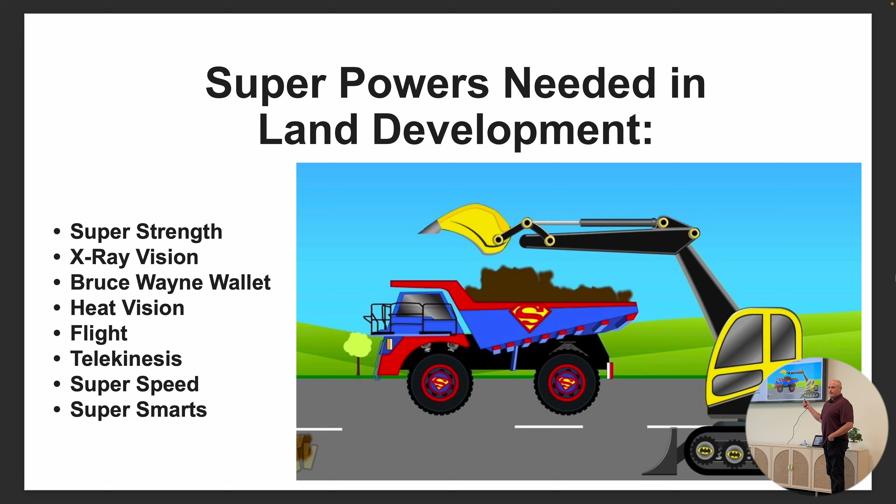So the way to get around all of these superpowers that you need is you've got to put in the extra work to plan and prepare your projects for success. Once you have the proper planning and preparation, the performance is going to come as a result of those two steps. So if you put in the effort up front to go through the due diligence materials, to work with your contractors, your city, and your engineer, you're going to find success at the end of this project, no matter how rough or rocky it is.

And every one of those projects that I mentioned that I had trouble with because I didn't have X-ray vision, all of those somehow strangely worked out. So in a world that's really challenging sometimes, I think we both have to accept the challenges as they come and take it for what it is, no matter how rough those challenges might be.

And then from there, we also have to have a bright outlook and hope for what the future can bring, because the reality is if we put the product out there, it will be well received by the market and we'll find a space that works for everybody.

And so no matter how bleak some of the things that you discover during the land development process might be, there's always room for hope that future project and the outcome will still be a good end result. And I'm here to tell you, even on the most challenging ones, that's been the case.

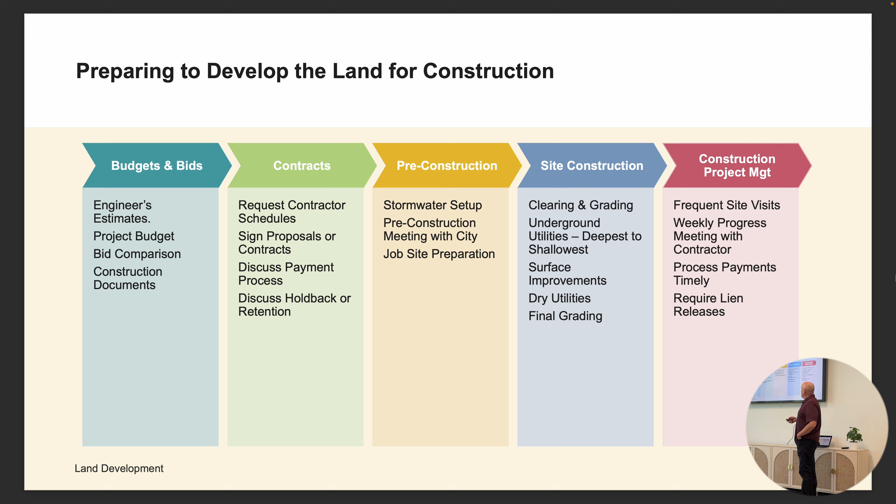The first step in our development process is we've got to prepare all our budgets and make sure they're lining up with our project expectations. So right out of the gate, we're going to start reviewing all of our original budgets and comparing them to how the project is shaping up.

During due diligence, one of the most beneficial tools we have is our soils report. That should be the number one thing. Once you get a project under contract, that really should be the first thing you order - a soils and environmental study. That will dictate almost everything that happens in the actual construction phase of your site, even though it's kind of a silent document that you just have to check a box to get.

It's going to dictate how thick your pavement is going to be. It's going to dictate your road design as far as how much subgrade and everything else you're going to do. It's going to dictate even down to the footing level of the homes that are going to be on these finished lots you're going to create. So the soils report is really the number one key document you're going to focus in on, and that's going to impact everything else. It's going to have a domino effect through your budgets and through your schedules and everything else.

To speak to that a little bit, Steve and I did a project out in Eagle Mountain once, and when we went into it, we knew we were going to hit some hard rock excavation, because we analyzed the soils report. We even did additional borings and digs to try and map out exactly where the hard rock was going to be on this site and where we could expect problems. All of that work we put in up front helped us get a better picture of how the process was going to go, and it also helped us on the budgeting side to be prepared for some of the additional costs of hard rock excavation and the additional schedule implications.

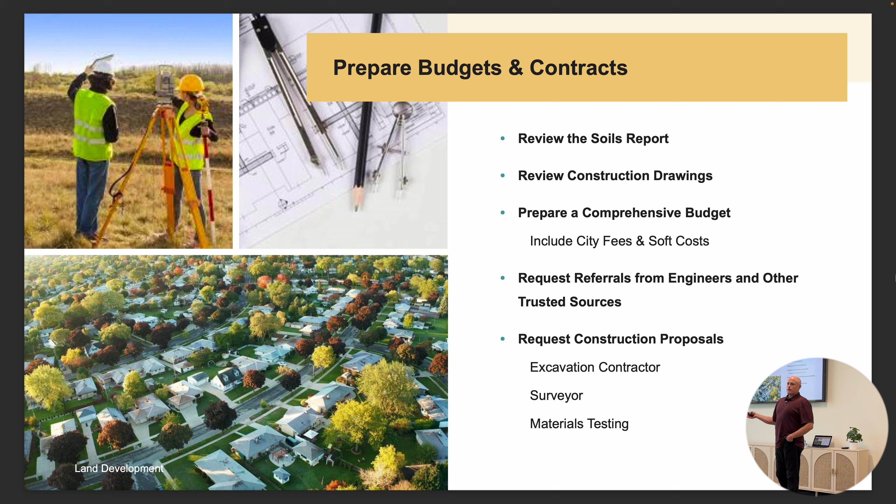So you're going to request bids from your excavator, your surveyor, and also your materials testing. You've got to make sure your soils engineer, usually I go back to the same guy that I got the original soils study from. The geotechnical engineer who gave me the soils report originally can usually handle the testing too. So I'll go back and request that, and once I get those proposals back, we'll start putting those budgets together.

If it's a really small project and a really small contractor, he might not ask you for things like the CAD drawings, and he might do it old school. And that's fine too. It just depends on the size and scope of your project, right?

When you're bidding your subdivision out, I think it's a great idea, and I use this as a best practice for every subdivision I do. I have my surveyor go out and do centerline staking in the roadways at every 50 or 100 feet, depending on the size of the project. If it's a small project, I'll do a tighter spacing on the streets. If it's a huge project, I'll get less stakes.

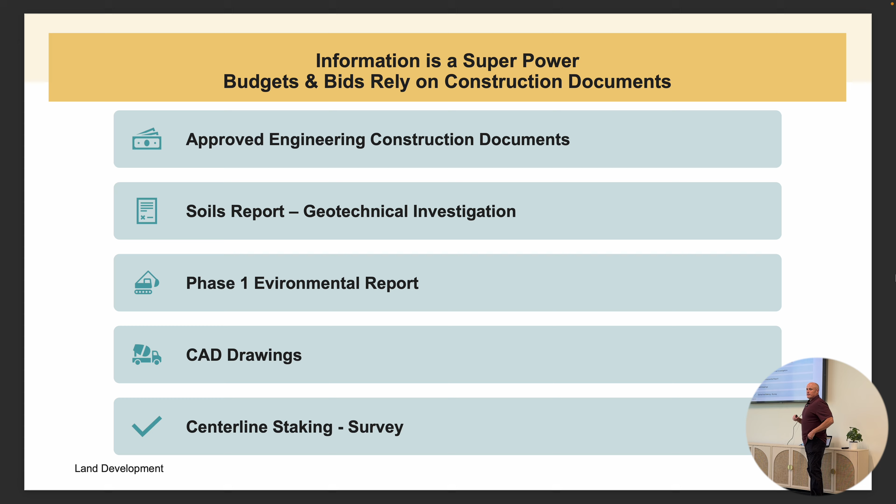Okay, this is the interlude. After you start getting your proposals back, you're going to start doing all of your number crunching. And really what you're looking for here is the sanctity of your Bruce Wayne wallet. You're trying to protect that.

And you want to make sure that you have enough money to finish this project once you get started. So this part is pretty simple. You're going to compare your bids to your budgets. You're going to request schedules from each bidder and make sure that those schedules still work with what your project timelines were expected to be.

And then you're going to go through and discuss contract-specific things with the people that you're going to award these contracts to. So you're going to discuss with your excavator, hey, I've got a construction loan on this, a land development loan, which don't exist anymore, so you're probably really working with a Bruce Wayne wallet somewhere. But if you do have a bank loan for development, which isn't common anymore but could be, you're going to discuss when he needs to turn in his invoices and when he needs to work with you on construction draws, how often you're going to be willing to do that.

Some contractors want to do monthly billing. That's usually preferred, and if your project isn't too big, that usually works with most people. Some other projects might be so big that you might do a payment every week or something like that. But this is where you discuss that. After your bids are in, you're going to discuss how payments are going to happen, and you're going to discuss timing of what to expect from these contractors. You're also going to discuss any holdback or retention and the lien waiver process that you're going to hold the contractor to.

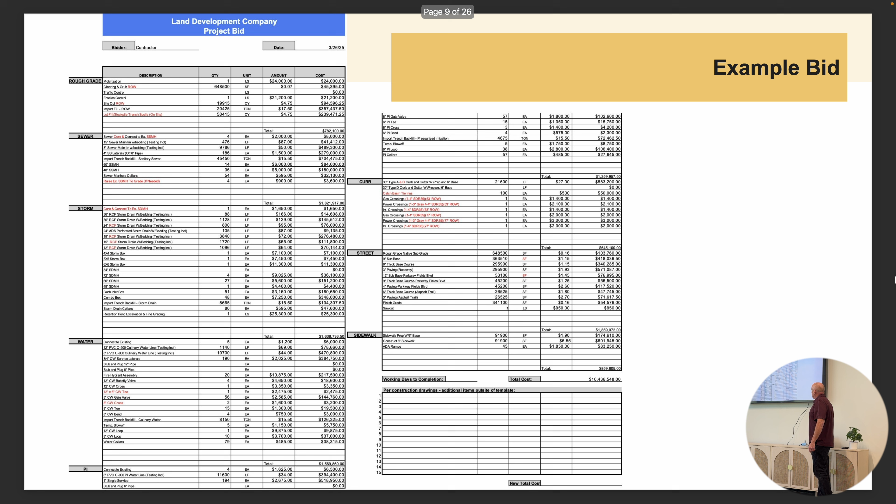So if we go back to our original budget - well, let's go to this. This is an example of a project bid. When I send it out to bid, this is the other thing that you might find useful. I'll usually fill out a project template that shows them the blanks to fill in, and this usually starts from the engineer. So a lot of times I'll request this engineer's estimate that will outline the quantities of material and pipe that go into constructing this subdivision.

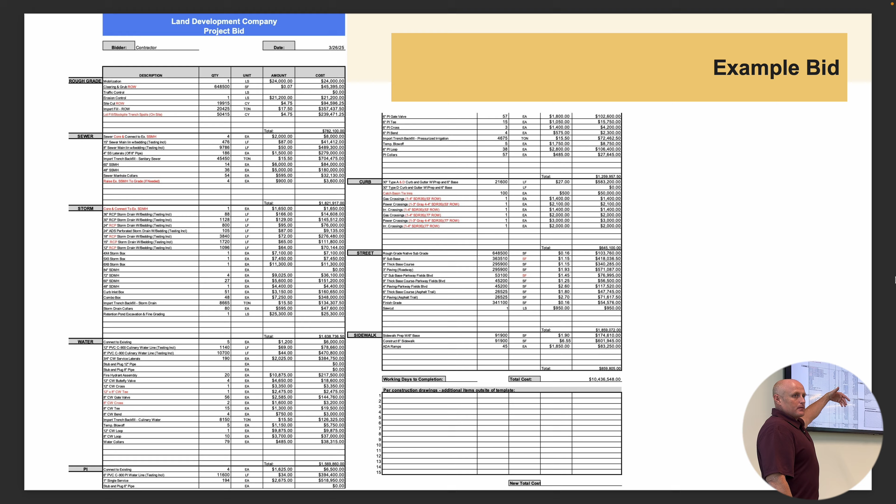They might charge you $150 or $200 to prepare this engineer's estimate, but they'll go through and fill in how many linear feet of pipe - or you can do your own takeoff. But I'll fill in a project bid template so that they know where I started from and what my expectation was. And when they do their own takeoff, if they get something different, it's really easy to compare their notes to mine. Then I'll be able to see where they're different and compare - why is your bid higher in this area or something like that? But it all starts here.

Their invoicing usually mimics how their bid comes back. So say they turn in an invoice for sewer. We know that at the sewer stage they're going to have pipe they had to buy, manholes from a different supplier, and gravel to bed that pipe with Staker Parsons or Geneva or one of the gravel pits. They're going to have all this material, so you go down your list of pre-lien notifications and say okay, I'm going to pay you for this section. You're billing me $1.8 million for the sewer, so I'm going to joint check you along with Staker Parsons and the pipe supplier, Core and Main, and Oldcastle precast for your manholes. You go down the list and think about who you need to pay along with that excavator.

Like Ronald Reagan, we want to trust but verify. We want to trust that our contractor is going to be good, but we also want to verify that the project costs are paid, because the lien goes to us, not the excavator or the general contractor. So we need to protect our interests and make sure those lien notices match up with our progress payments. That's very important. You're either going to request a lien waiver as a condition of him picking up the check, or you're going to straight up joint check them, and they'll have to get the gravel company, pipe supplier, or precast concrete company to endorse that check for them to cash it and get their $1.8 million.

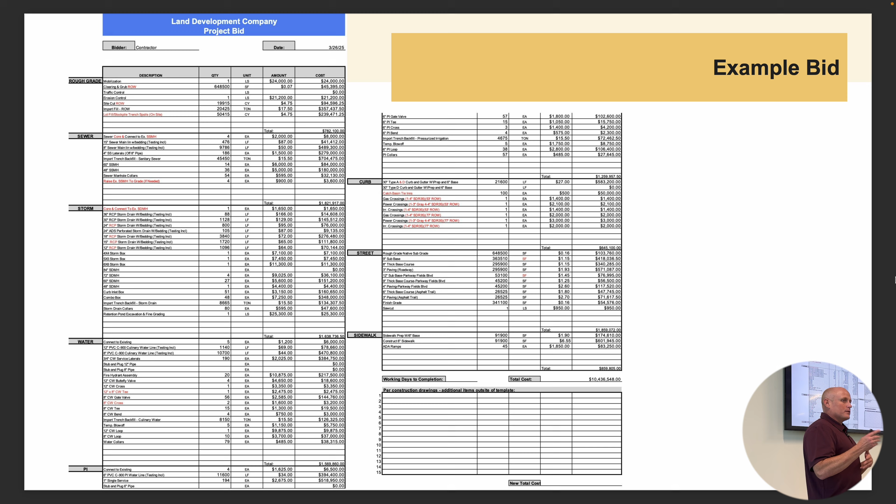If you don't know how to do a joint check, ask your bank—they will help you through the process. Any bank knows how to do them. Your accountant probably has done them in the past. If you have an accountant or bookkeeper, there's somebody in your network that knows how to do this, but it's for your protection.

Once you've got all that discussed, you're going to go through and award the project, but you're also going to do that after you compare all your bids. I've got this in the collateral that Steve's going to send out to you, so the assets you'll walk away with today are examples of this—you'll see this is a bid comparison spreadsheet that I did.

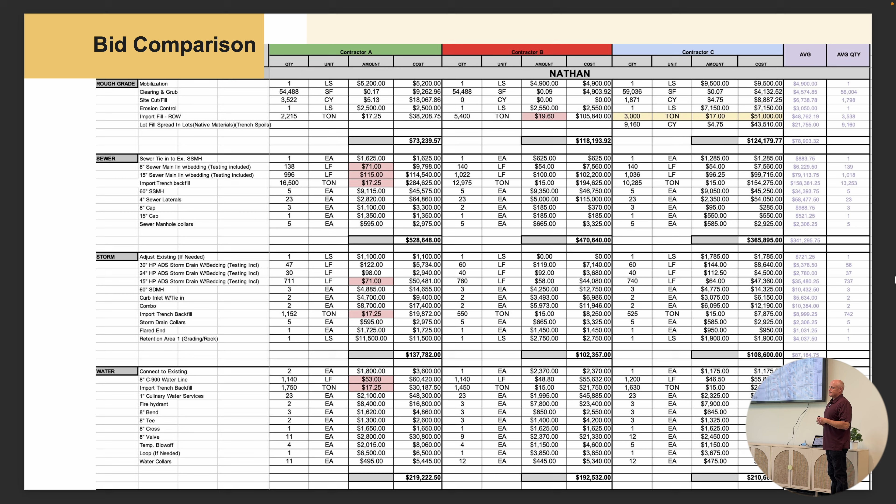I've learned from sad experience that sometimes the cheapest contractor or subcontractor is actually more expensive, for a number of reasons, like taking longer or doing poor quality work that I need to pay someone else to redo. How do you make sure you're choosing the best guy for the job while having budget in mind? I know you just touched on this a little bit.

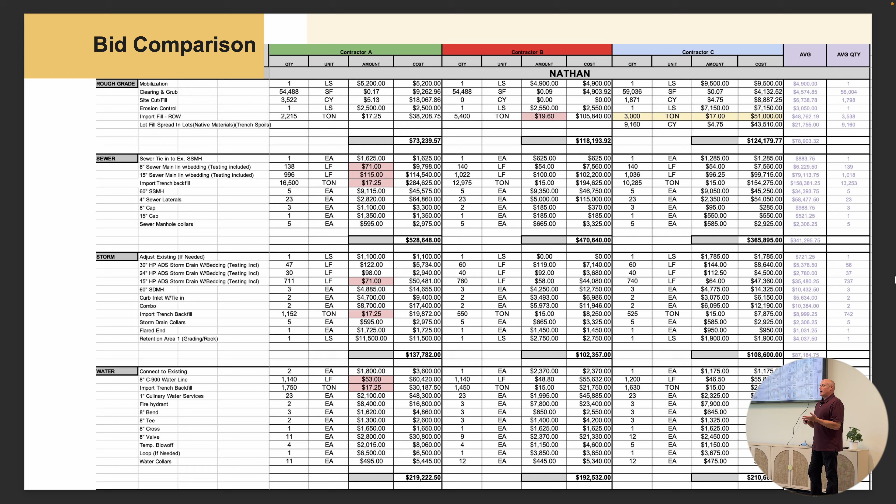That's a great point. There are instances where I don't pick the lowest bidder, that happens more often than you would think. The process for that is a combination of experience, reputation, and maybe a referral too. I'll give you a good example of that.

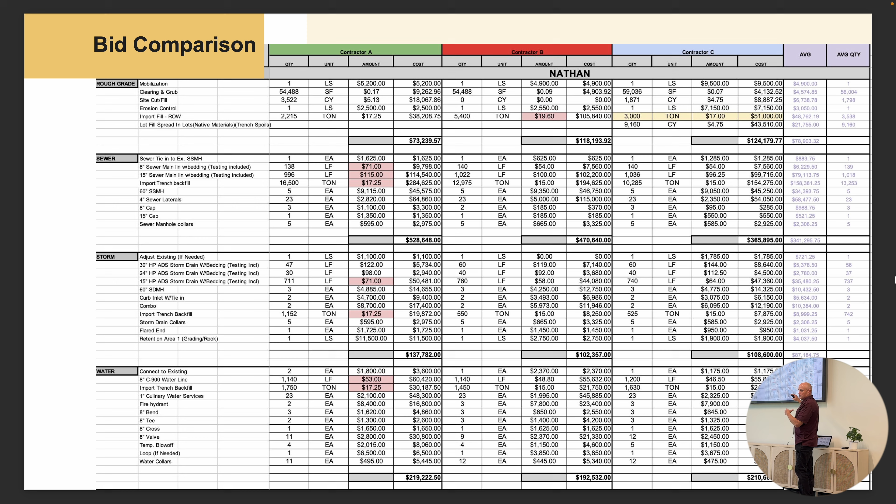I went with a contractor on a project I did in Phoenix two years ago. When we did this comparison process, we didn't know these guys at all, they were in a totally different market from us. As I started to narrow down the two guys I thought were the best, along with this spreadsheet, the other thing you've got to take into consideration is...

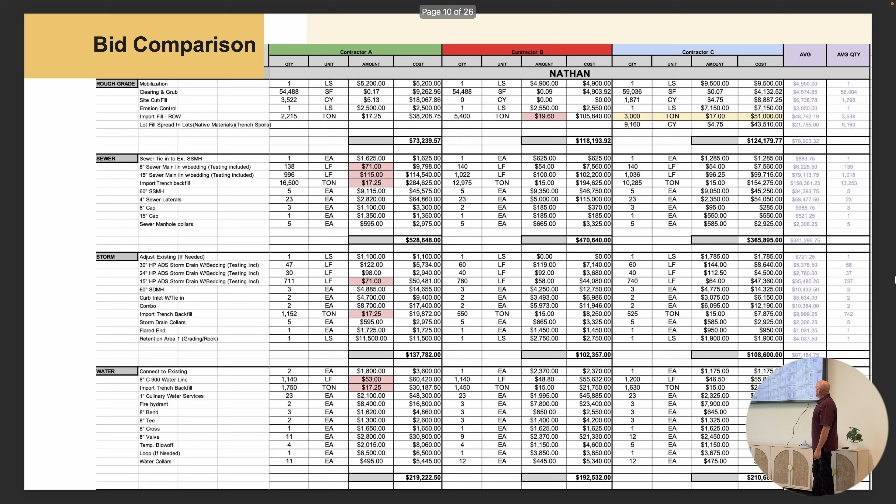I don't know if I have it in this section or this one, but during the bid process you're also going to be requesting the schedule, which is also included in the stuff we're going to give you today. During this bid comparison, you're also going to be comparing schedule. If you've got a really small contractor whose price is super small, and he might be the most compelling value dollar-wise, what if his schedule is two or three months longer, and that puts you in a window where you might not pave this year?

Well, then you're waiting till April the next year, right? So now's the time to start asking all those questions.

So going back to that Phoenix contractor, we started narrowing it down to 2 people that we thought were looking pretty good, and we started to dial in these overall numbers, and we started to ask questions from people we knew about what those contractors could really deliver. And you know what else we did? We asked those excavators, those contractors, to tell us what are some projects I can go visit that you're doing now or that you recently completed, so I can go walk them and see what your process is like. So this is the time to start doing all of that due diligence.

Both of your comments are super relevant in that space. Now is the time to start vetting your contractor. Before you sign a contract with them, you really should feel really good about how these contractors are going to deliver your site on time and on budget. If you interview another developer that used them and they say their schedule was great, but I got this huge change order because they had to keep going and they wanted to go fast, and then I paid for it in the end, right? Then you're going to take that into consideration. So it's going to be different for every project, but it's no less relevant, and you've got to start comparing all of that.

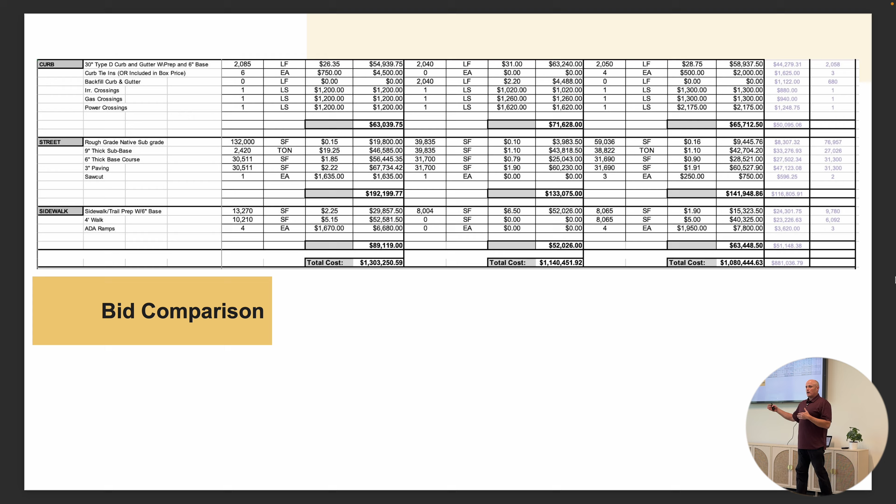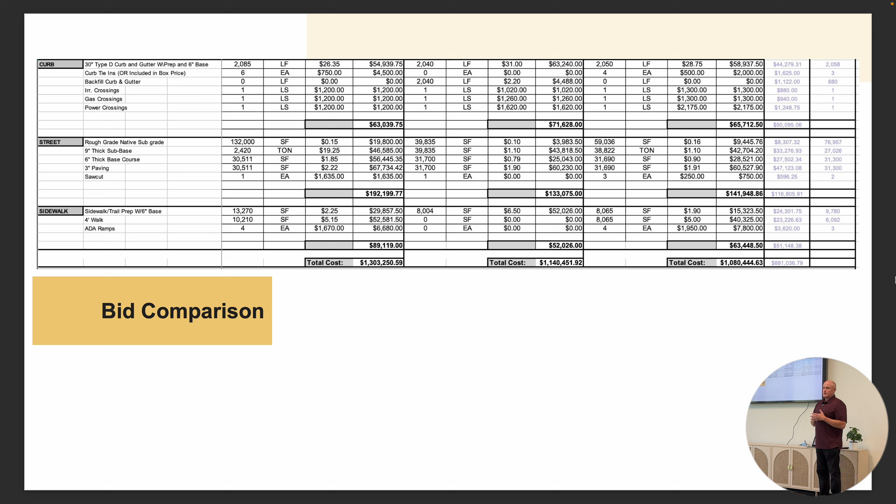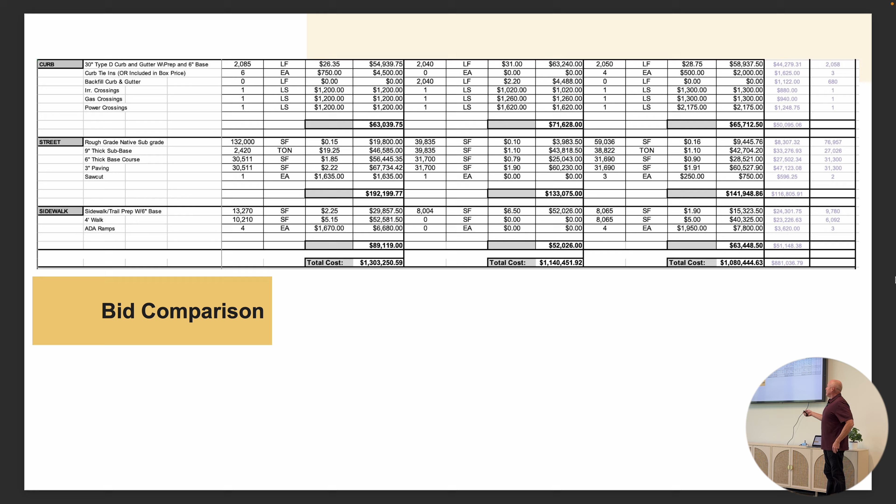So proceed with caution if you're getting an outside excavator or general contractor that hasn't worked in that area before. Yeah, it seems like it's a challenge because you're getting to know someone you've never worked with at the same time. Yep, exactly. And that's where you're going to rely on your network, including the people you've recently added in the city you're working in, the staff you're doing business with every day. You're going to find new people that will help you through that comparison process. So all of that is valuable, but you need to do it before you award the contract and sign a binding agreement on this stuff.

All right, so we've already talked about most of this. Basically, like we've said, you're going to start analyzing all of this to determine who is the best fit. And at the end of it, you're going to award the contract to the contractor you feel is the best fit for your project. It doesn't matter who has the shiniest bulldozers, it doesn't matter who shows up in the nicest project truck or even the dirtiest project truck. You're going to make adjustments to how you vet that contractor, and you're going to pick the right contractor that meets all the criteria you've outlined. And it's all coming from those 5 high priority documents and pieces of information you're using during the bid process. Does that make sense?

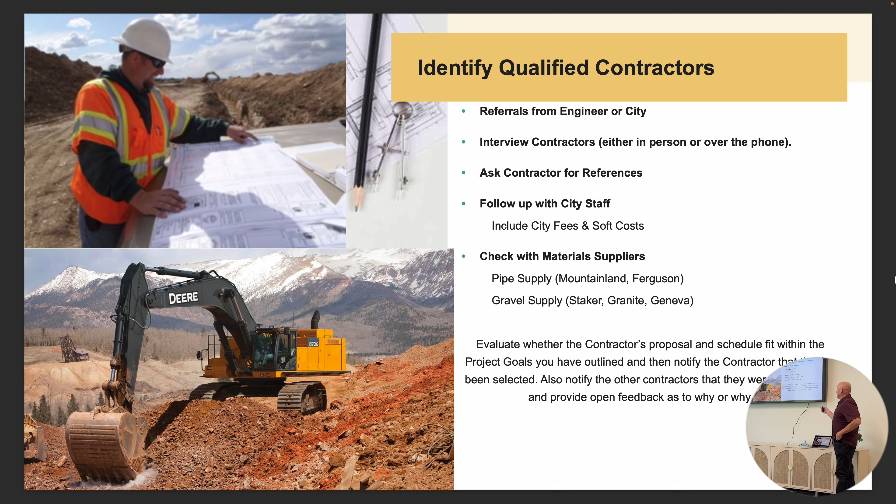I've cleaned up the formatting for this presentation. The one I gave you is a little more detailed in the Excel spreadsheet. But nothing proprietary here—we're just trying to fill in the details of when this project can go.

We always start generally with the gravity-fed utilities first, the deepest ones. Usually that's our sanitary sewer lines—sealed sewer systems that feed off of gravity, at specified slopes for miles and miles, going to a sewer plant hopefully very far away from your project, where it eventually gets processed for release later.

So you start with your sewer main, and then usually your water main is next, because it's sequentially the second deepest utility. Then you go through storm drain, water services, or maybe your pressurized irrigation.

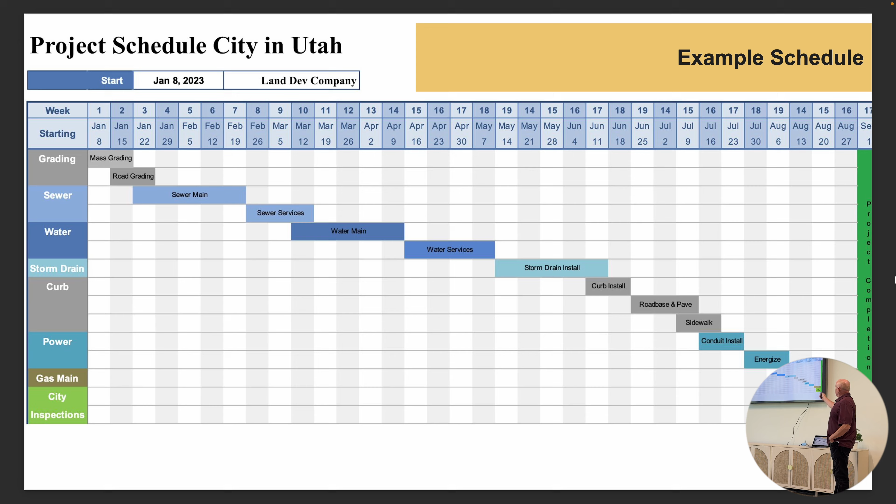So once you award the project, you really just start focusing on your schedule—when you can start. That begins with your pre-construction checklist. Now you've got signed contracts, and you start hiring people to actually build the site and get them out to do things. Usually the city won't let you have a pre-construction meeting until you have the stormwater pollution prevention set up.

Stormwater pollution prevention is an important part of our industry. It keeps the dirt, mud, and silt out of our storm drains and out of our creeks, rivers, and lakes, so those stay clean for generations to come.

One of the first things you'll have to do is hire a consultant to do your SWPPP plan, your stormwater planning, and start setting up some of your stormwater pollution prevention. So you'll put in stuff like silt fence where it's required—maybe a berm or trench that interrupts the flow of silt across your property so it can't escape the site. You'll put in track-out pads, concrete washouts, stuff like that.

But usually you have to have that set up before you can do a pre-con with the city. That's an important step. If you call the city and say, hey, can we have a pre-con, one of the first things they'll say is, do you have your SWPPP set up yet? I haven't seen it come across the state system, because the cities have to approve all of those. So you're going to have to do this.

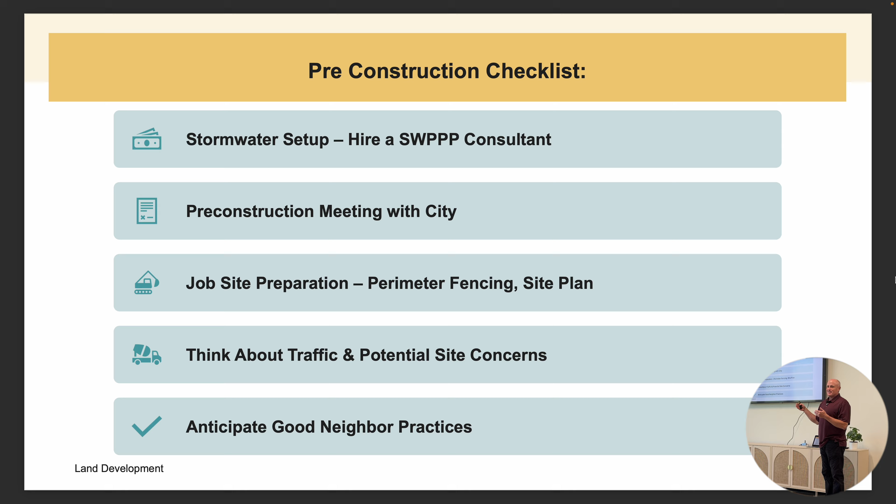During that, you're going to think about all the traffic and potential site concerns. I've had projects where I had to shut down a road. I actually love doing it, but I shut down the road in front of the IRS building in Ogden, and nobody could get in or out. That just, for some reason, made me feel good.

You're gonna talk through with the city all of those traffic concerns and any interruptions you're gonna cause to surrounding neighborhoods and businesses, and try to do that in a way that's courteous and respectful. With the IRS building, I did it on a weekend over a Labor Day holiday so I could have enough time and they weren't worried. So it didn't really impact anybody, but it still felt nice to shut it down.

So you're gonna think about all those things when you're setting up your site plan. And really, this is the most important thing: you're really just focused on how to be a good neighbor. It takes a lot of disruption to build a neighborhood. It doesn't come from nothing.

You can go to any of these developments up on the mountain. When they dig the sewer lines, they have giant mountains of dirt all over your site, and those things don't clean themselves up. Kids love dirt piles, right? I love dirt piles still. I'm just a big kid anyway.

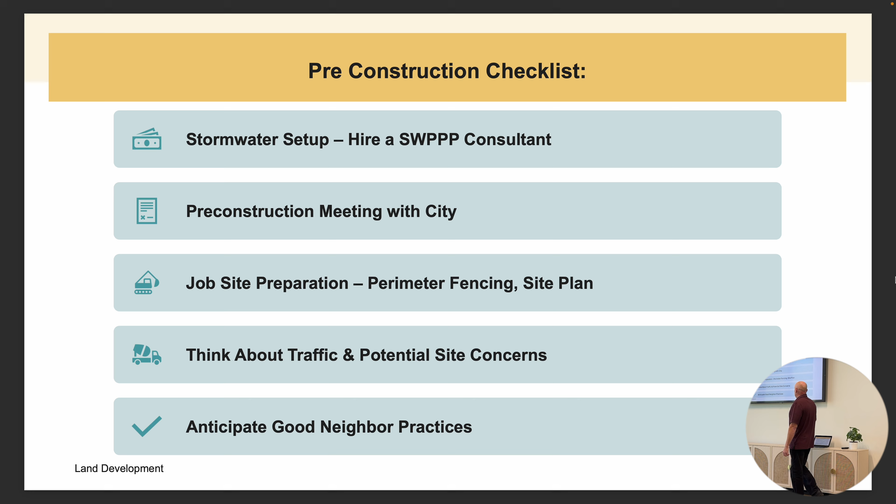So you've got to figure out how to be a good neighbor as you're building these highly disruptive sites that you're going to dig all the way up and then start putting back together. Be a good neighbor, think through everything you need to do to keep your site clean, organized, and moving forward, because that's the main thing. If you're not a good neighbor, I can promise you'll get stopped and called out for it, and it will delay your project.

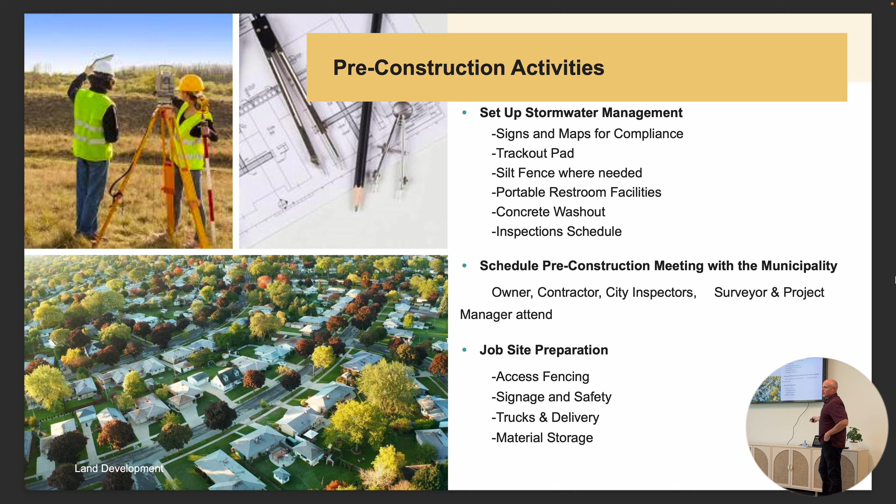All right, pre-construction activities continued. We've talked about all of this stuff. Material storage is always a big one. The materials we put in subdivisions are not small—they come in on multiple semi-trucks. You've got manholes that weigh 6,000 to 10,000 pounds, giant concrete structures, that have to be stored somewhere. So you're going to have to find places to put those. All that stuff will be handled in your job site preparation. Once you figure out where everything goes, then you get the privilege of building and moving forward.

Like I said before, clearing and grading is the first step. Whether you have existing vegetation on your site, you're gonna have to take that into consideration. My first public home builder job was in Tucson, and we couldn't just clear the land. I did a project last year that was an old peach orchard, and I just went in and bulldozed all the peach trees, hauled them away. Nobody said anything—it made me sad because I like peaches and orchards, but we had to do it to clear the site and get everything prepped for homes. But in Tucson, you wouldn't be able to do that.

If there are native plants in Tucson, and this applies more to southern Utah—Cedar City does this too—they do a native plant analysis. If you've got cactus species or something that needs to be saved, they'll make you save those. I've had to put in acres of nurseries where I take the native plants, like in Tucson—you've seen the Wile E. Coyote and Roadrunner cactuses, right? That's called a saguaro cactus, and we had to save every single one that was feasible to save.

So what we would do is have a company come in and dig up the saguaro cactus, put it over on the sequestered side of our project where it didn't disturb anybody, and we'd keep it in the nursery for four months.

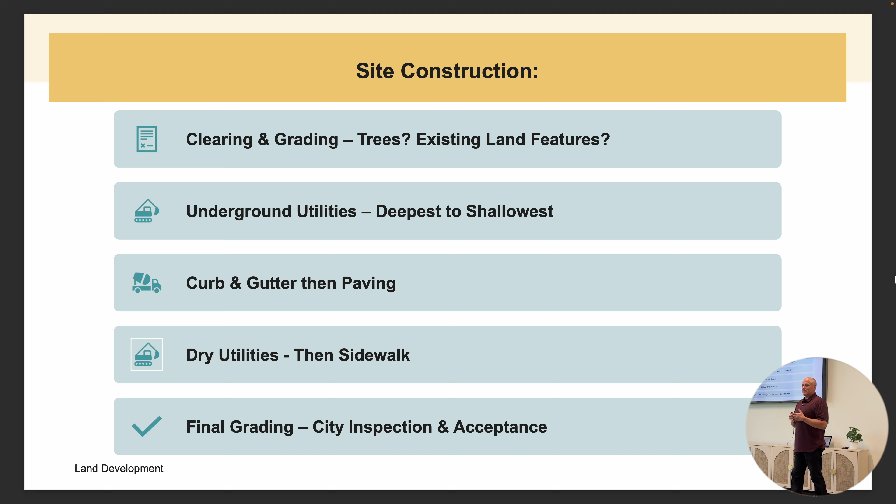And then after your sidewalks go in, we wrap everything up in a pretty bow, clean it all up, and have our city inspections. That's when we try to get the city to accept the subdivision into warranty. Then we get the privilege of monitoring that subdivision for a year while every builder comes across and breaks all the sidewalk you just spent lots of money on, chips the curb, breaks your asphalt, and all kinds of stuff. And then a year later you get to revisit all that. So it's super fun. And you do it for free. So that's great.

So that's an important process. And I've found that one of the most important things to making this city inspection and acceptance happen goes back to housekeeping. If the subdivision's clean, you've got the streets swept, everything's visible, and you can see all the sewer, water, and marker boards and stuff, the city usually is pretty easy on this kind of stuff.

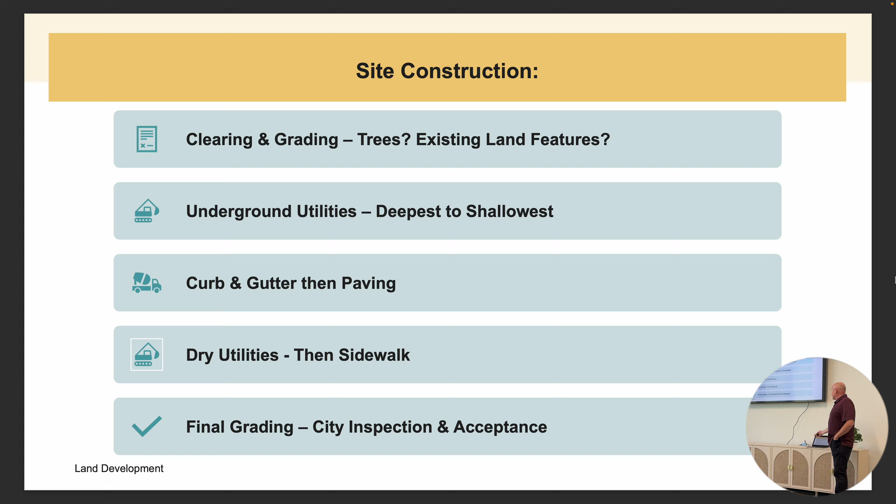Generally, you can have a crack in a sidewalk and they're not going to ding you too bad unless that crack is lifting or separating past a materials specification that they outline in there. Remember that standards book I told you to get at the pre-construction meeting? That's where they outline exactly what they're going to make you tear out to get into warranty. So generally, if your site is pretty clean, you can get this inspection and acceptance process pretty easily.

When you're building the site, I will tell you as an owner, it stresses me out every time there's heavy equipment and people working in the same space. And unfortunately this has hit home twice this year. I've had people die on my site, and it is not a good thing. Everybody should go home at the end of the day from their job.

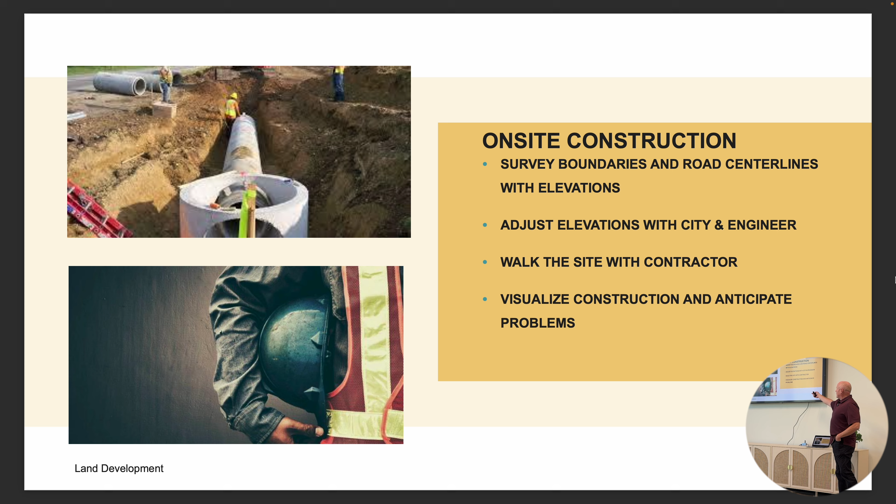And when you have to call somebody and tell them that somebody's not going home, it is not a good situation. So when you're building your sites, you want to be a second set of eyes, or maybe a third or fourth set of eyes regularly at that site to make sure that things are progressing safely and up to your expectations and standards. You're the owner of the project, and you've got to take real responsibility for how that project is being constructed. It's not just being a good neighbor - that's people working on your site to your benefit so that they can develop your project. So you've got to treat that very carefully.

So just to talk about some of that stuff a little bit more, this is an example of a storm drain trench. This is concrete pipe. This manhole here probably weighs 5,000 or 6,000 pounds. And the process to install this, you can see you've got a guy in a trench, right? This actually looks like a really safe trench. So if I drove by the site, I would not be alarmed by any of this.

See how they've dug a bench? So they've got the main trench at the specified depth per the plan, but then alongside of the trench on both sides, they've taken out extra material so that that trench, if it did cave in, would not harm that individual that has to get in and out of that trench, right? So that's something to pay attention to as you see this kind of stuff.

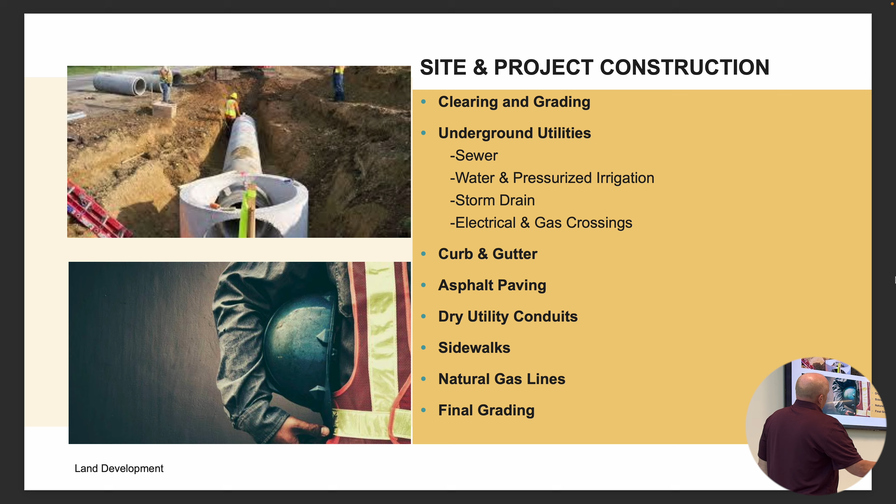The more you do it, the more familiar you'll be with safety practices, but you need to watch for red flags. And some of the red flags come up when you're doing these 5 best practices: frequent site visits, weekly progress meetings with your general contractor on site where you compare his schedule to what you expected to accomplish on the site during that time.

And you're talking about things like process payments and lien releases and all that stuff. And like I said before, we're trusting them to do a good job, but we're verifying that they're actually doing a good job because it's our site, it's our land development project, and we're going to make sure that it goes well.

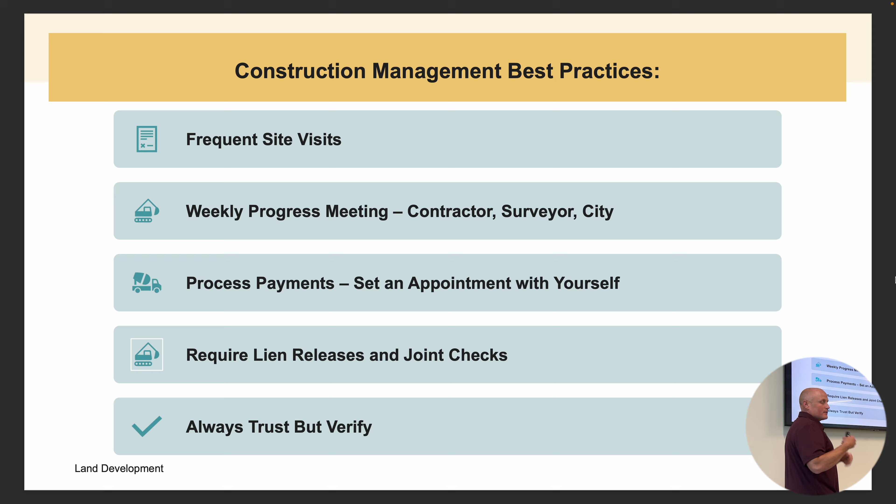And as we're doing that, that comes into a whole separate career path. There are guys that are project managers that do this for a living. If you feel like you need additional support, if this project is too big or a daunting scope, there are people that do this for a living. And if your superpowers aren't adding up to whatever you need to develop this project or that project that you're contemplating, access your network. There's somebody there that can help you manage that, help you do a good job and make it a successful outcome.

Project management encompasses all of this. You can read through the list, but all of this is stuff that you should either have experience with or feel comfortable learning. And if you don't feel comfortable learning all of these things to manage your project well, then I would raise a hand and ask for somebody that can come in and help you.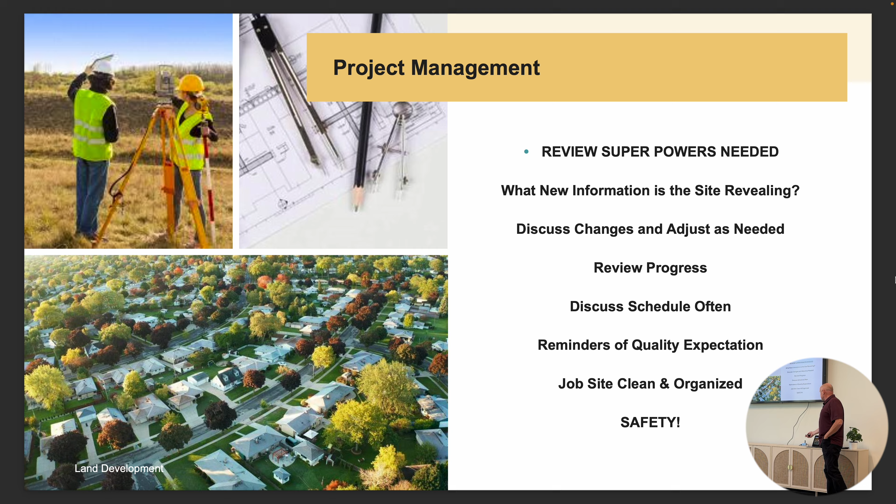A lot of people don't realize this, but a cubic yard of material — a 3 by 3 by 3 piece — can anyone guess how much that weighs? Someone said it: about a ton. So a box of dirt that size, roughly 3 by 3 by 3, weighs 2,000 pounds or more. And my super strength isn't quite up to that. So if you've got a guy in a trench and it collapses, there's going to be more than a ton of material coming onto that person that they've got to deal with.

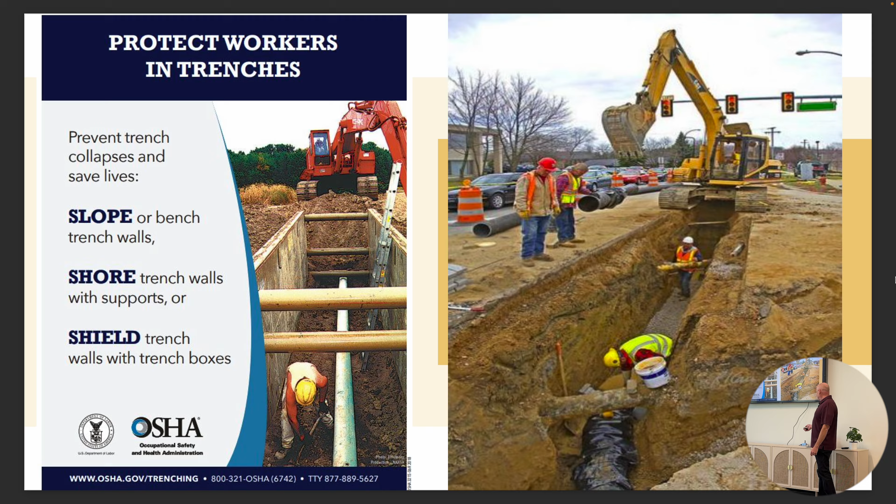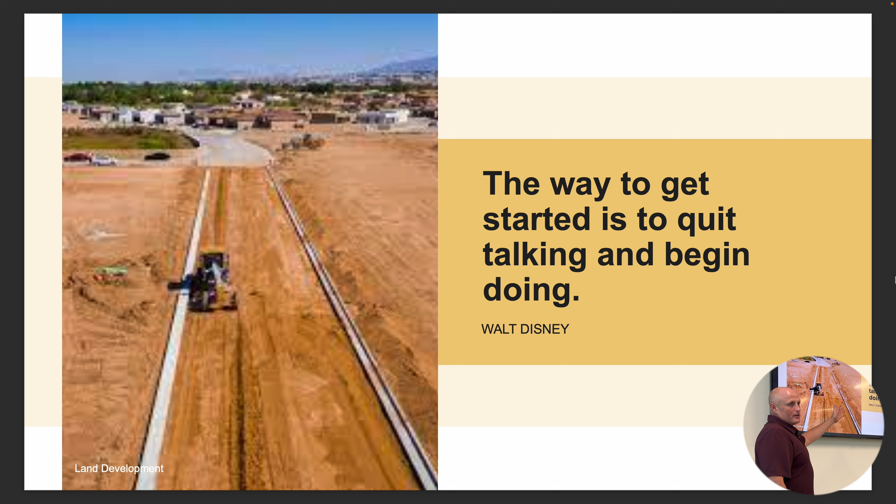But the only way to get started is to quit talking and begin doing, just like Walt Disney said. So as you guys go and do these land development projects, I promise you, you can be successful doing them. They seem intimidating, but really once you do one, you're ready to go, and you'll tackle some more. You'll probably make some mistakes along the way, but you'll figure them out, especially if you're accessing your network appropriately and asking for help along the way. But as with everything in life, an ounce of preparation is worth a pound of cure. And the more effort you put into the planning of your development, the more successful your project will be in minimizing delays and having a successful project outcome.

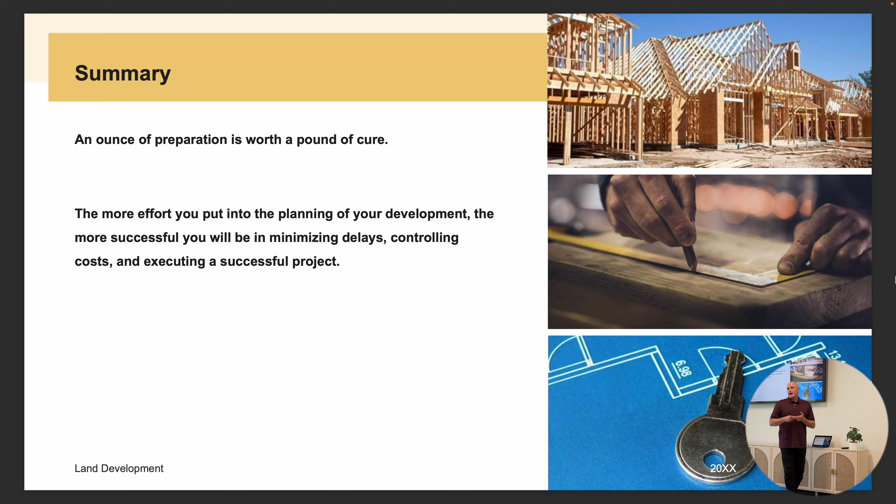And that's what I've got. Any questions? Okay, thanks everybody.